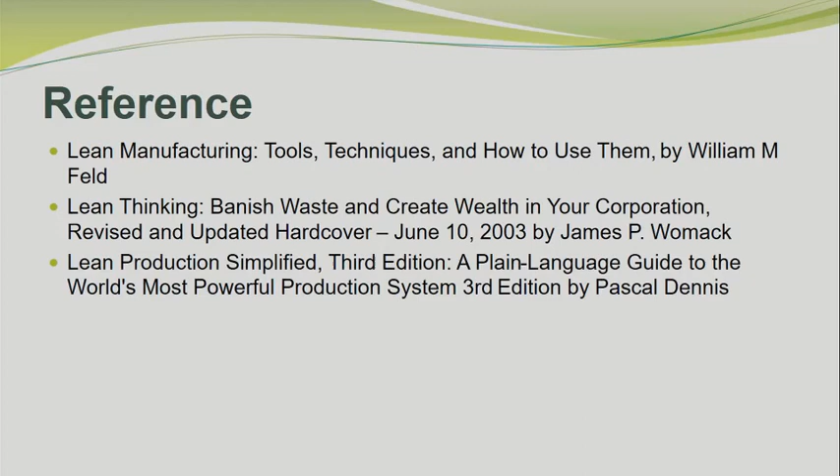Today I'm talking about lean manufacturing. I'm from this Master in Engineering Technology Management. So today is my pleasure to show you more about lean, what is lean, what is the purpose of lean, and how this lean manufacturing helps Vietnam industry.

First of all, there are a few reference books which are very useful. For example, Lean Manufacturing Tools, from which you can learn the techniques of lean and how to use them. Another book is called Lean Thinking, which covers thinking for management, how to execute lean in a company, and how to improve productivity through lean. Another is Lean Production Simplified, on how to simplify lean through innovation, improve productivity, and reduce waste. And this one is about the most powerful production system in lean manufacturing.

This is a textbook which covers lean, as I mentioned just now.

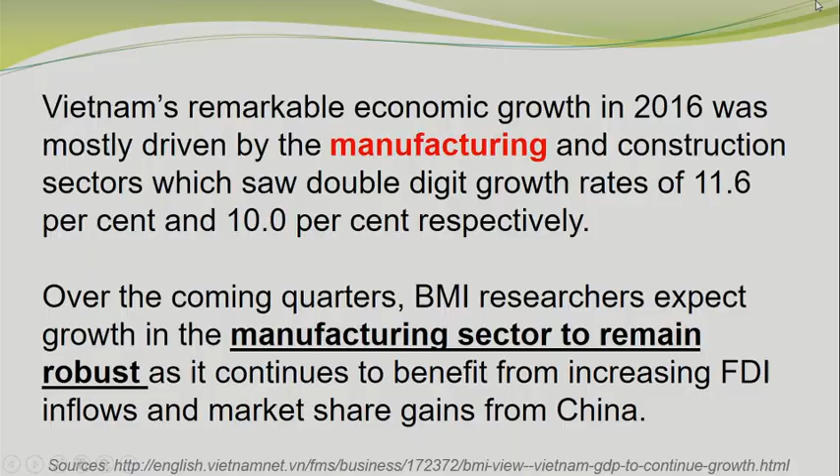Vietnam's economic growth last year was mostly driven by the manufacturing and construction sectors, at about 11.6% and 10% respectively. This shows that the manufacturing sector in Vietnam remains strong and robust, and continues to benefit from increasing growth over the next few months due to gaining share from China.

Today we are focused more on lean manufacturing, and how lean helps improve or reduce waste, and deliver on time while maintaining high quality. Here you can see the tools for lean.

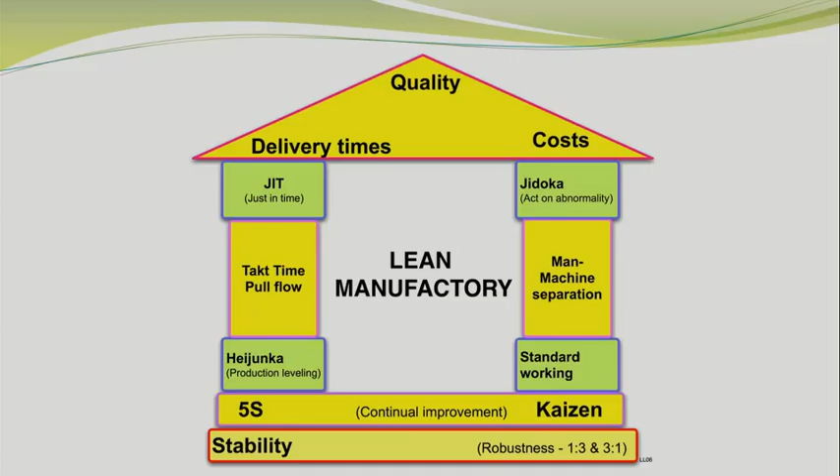Firstly, you can see Kaizen, which means continuous improvement, where you can improve productivity and enhance profitability. Then there's 5S for stability, and JIT, just in time, where you can deliver something just in time, so you are not out of schedule or facing a long delivery lead time. All of this is tools used in lean manufacturing.

From here, we know that the manufacturing line has been improved, so we need to know how to improve the manufacturing line here in Vietnam.

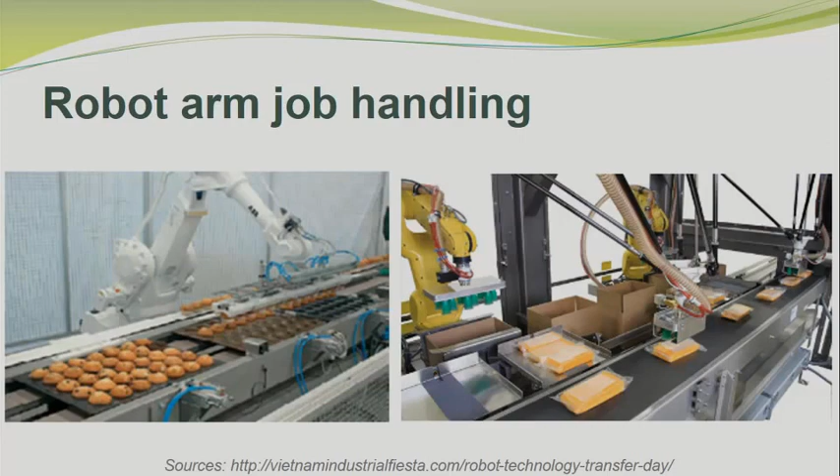So this shows a lot is happening, and we need to know what is happening now in Vietnam's manufacturing line. You can see now there is a robot arm for job handling, for example. This is the manufacturing line for the food industry, where they replace labor with unmanned robotics, using the robot arm to do the job more precisely and reduce waste.

This is another kind of automation to eliminate waste and enhance productivity. This also shows that automation improving productivity is a fact for the next few months, because a lot of new technology has been improved to replace so-called low productivity. Here we are talking about how to improve the manufacturing line in Vietnam.

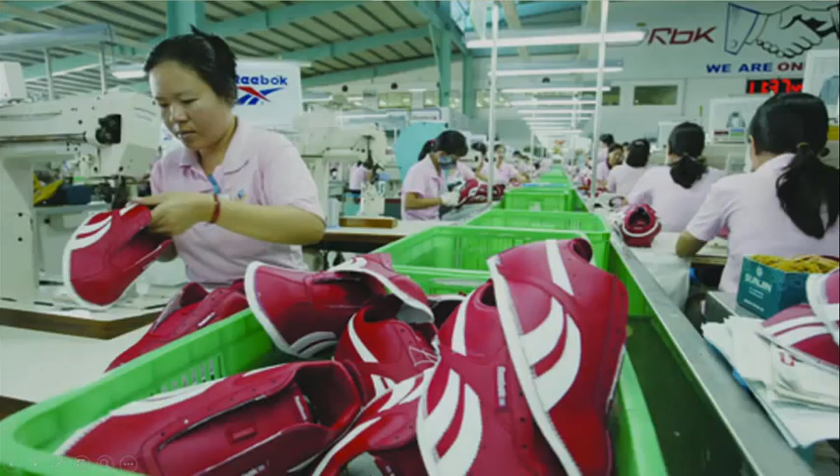For example, you can see the shoemaker in Vietnam, Reebok, nowadays still using human labor to do manufacturing of shoes. Sometimes the shoe may have a rework or reject rate, so how to improve this rework or reject rate is where lean manufacturing will guide.

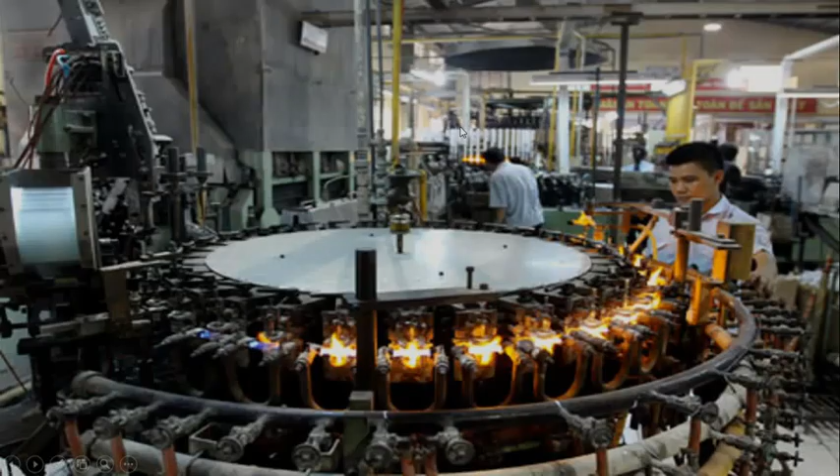And you can see a lot of workers over here still using labor. As you know, humans making things will have errors. How to minimize error, lean will guide into more detail.

Nowadays we're talking about rework. Rework means something we do and cannot achieve the quality or expectation, so we need to redo or rework it. Rework means we have to do double work to get the thing done correctly. This involves time, cost, and labor cost. Indirectly, this will cause the total cost to increase due to rework.

So these are talking about money, quality, and time. All this, if you do rework, will be at the disadvantage side. So we need to think about how to improve this in the manufacturing line.

Now we're talking about waste. Lean manufacturing means reducing or eliminating waste. The waste can be categorized into many criteria. For example, overproduction. When we try to make mass production, if the quantity is too much, it will cause additional inventory cost, additional material cost, and additional labor cost. All this is waste in operation.

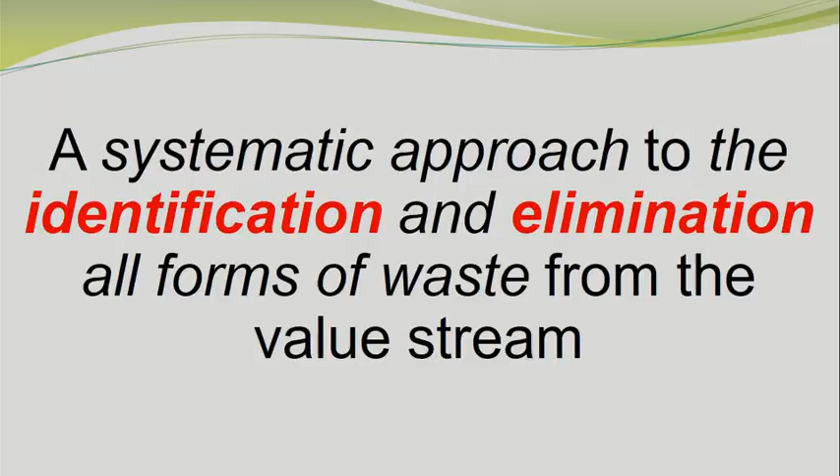Another is talent, skilled workers. Are we still relying on the conventional skilled worker, or do we have to rely on machine technology or new technology management to manage the machinery or process in order to have a better, consistent performance? So lean is a systematic approach to identify and eliminate all forms of waste from the value stream.

Movement is also a waste. If group technology is not implemented, when you move from point A to point B, it will take a lot of challenge instead of a short distance path, and this will cause additional cost due to movement.

Defect, when we do something like injection molding, for example, if the job is not according to customer expectation, this is a defect. Defect means loss, meaning additional cost that contributes negatively to profit. So defects have to be reduced.

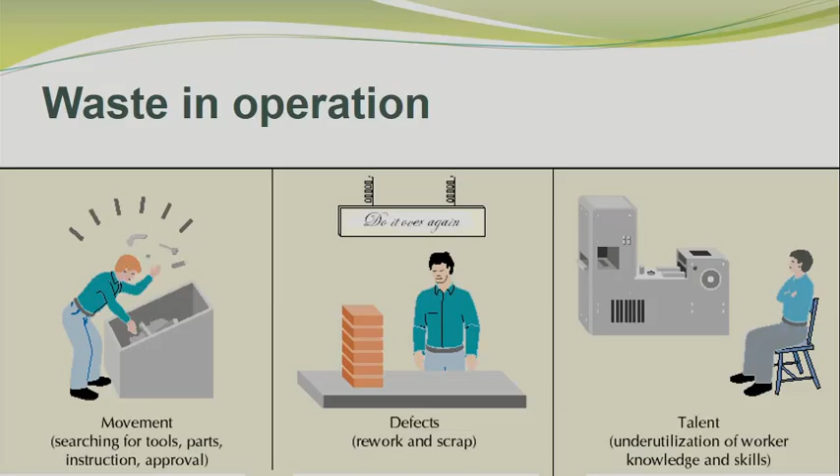Now we're talking about how to control the waste or reject rate. We have to control waste through good quality control, and we have to achieve high customer expectations with good quality.

For example, recently in automotive news, Takata airbags had a defect that caused a lot of safety issues. Defects were found in Takata airbags for all kinds of Japanese cars and Euro cars. So Takata company recalled a lot of airbags, and they had lawsuits for this because of the cost and a lot of loss of life.

So this shows you how significant lean manufacturing is in product making. For example, this Takata airbag, where you can see there is a malfunction causing improper safety. Lean manufacturing will contribute to safety for the consumer, and we can build a trust level for the customer and show the reliability of the end user product.

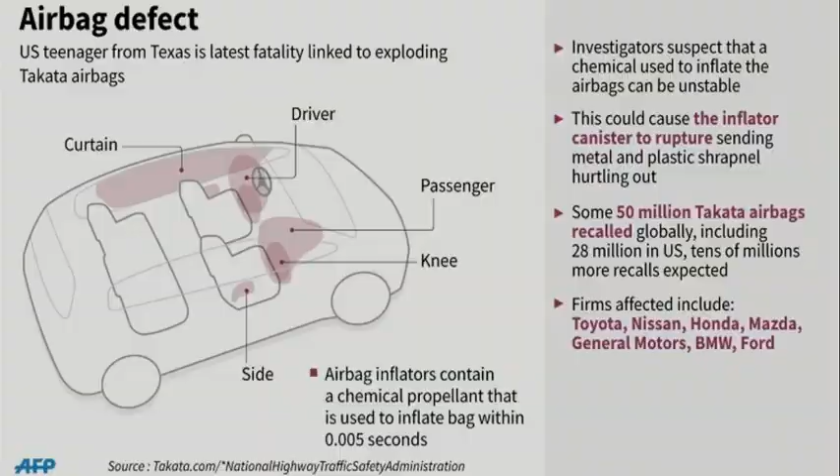This is to show you the example of the airbag defect. This shows that the airbag caused a lot of safety issues and had to be recalled, costing a lot of money, requiring research and rework again. The recent defect found in Takata airbags resulted in the biggest automotive recall in history last year. This recall cost billions of dollars.

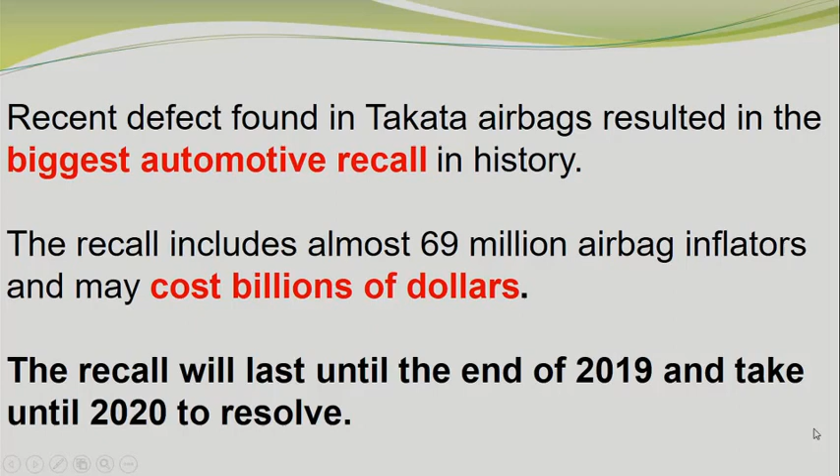Again, this recall will last until the end of 2019 and take until 2020 to resolve this issue. So now, how to solve this without lean manufacturing? How will lean manufacturing help? If a company operates without lean, they will cause a lot of problems with defects and waste money.

So the company will lose money and won't have profit in the long term. For example, Takata airbag had to pay $1 billion to settle lawsuits. All this happened because of overlooking quality and safety to the consumer. We have to ensure products can meet customer needs and expectations with zero defects and minimum cost as possible.

Just now, as a briefing, we talked about the background of the recent news and what is happening in Vietnam. So with lean manufacturing, we have to work ahead and implement and execute it to reduce this kind of risk and improve profitability and reduce waste.

Lean manufacturing talks about waste, the system, the tools, and the principles of how to improve the existing process and achieve continuous improvement. Not only this, with lean manufacturing you can improve efficiency, have a better competitive position in the market, and increase profitability for the business.

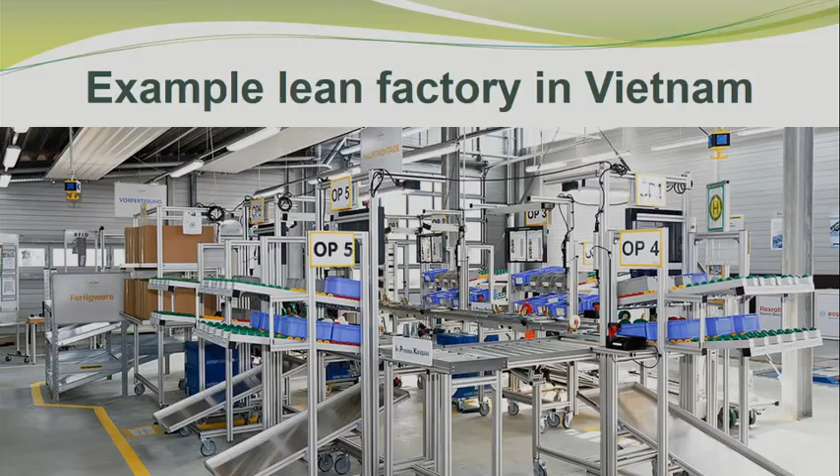So lean manufacturing is about stopping waste, or zero waste. Reduce the waste and minimize it as low as possible. Now let's talk about an example.

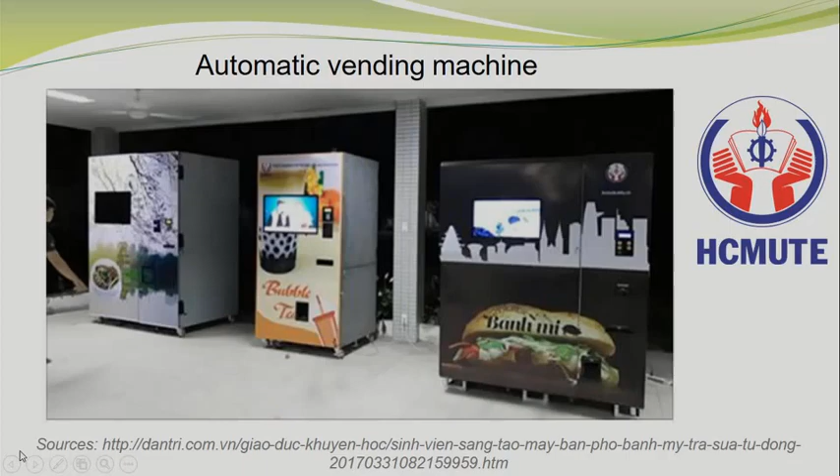Ho Chi Minh City University of Technology and Education invented an automatic vending machine. This automation is an auto vending machine for bánh mì, phở, and milk tea. This is new, and it will enhance productivity while reducing cost, because you no longer need a conventional restaurant. If you want to eat phở, you just go to the vending machine and buy it directly—very convenient.

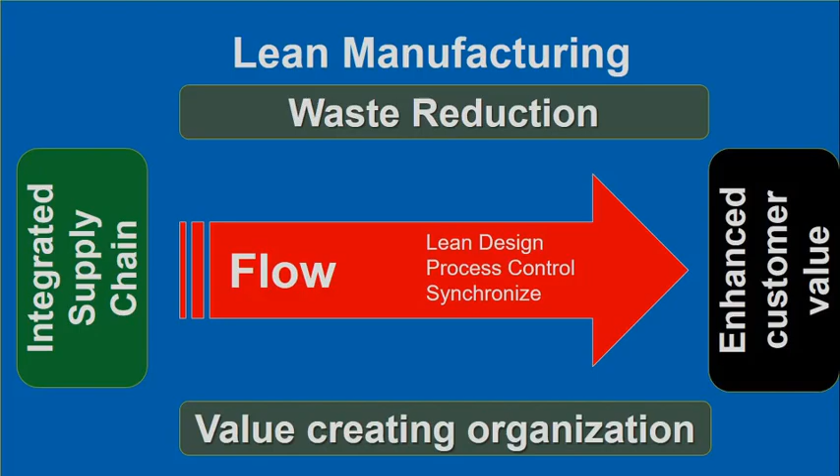So all this is innovation, talking about improvement and continuous improvement for the current situation, improving productivity. Lean manufacturing again is about waste reduction and creating a value-added point for the organization, enhancing customer expectation and value, and integrating the supply chain. All this contributes to lean design, process control, and synchronizing all processes into one centralized process. So all this contributes to lean, where lean plays a main role.

Lean cannot work by itself. Lean needs a group of people. Lean needs support from management and all kinds of departments, so that lean can move forward. Empowerment of staff is very important to make lean management and lean manufacturing successful. Successful lean implementation comes through strategy, selection, support from management, and execution like Kaizen, continuous improvement.

Lean Six Sigma is another tool for lean, where you define, measure, analyze, improve, and control. So lean is a closed loop where you can do all of this in one process: define, measure, analyze, improve, and control.

Define what the problem is now. The problem must be measurable. What is the root cause of the problem? Why is there a problem? What is the cause? How is the effect of the problem? And you analyze—how do you analyze? Through systems, tools, software, or through experience—and improve from the defect, and finally you control the quality. All this is talking about lean and Six Sigma.

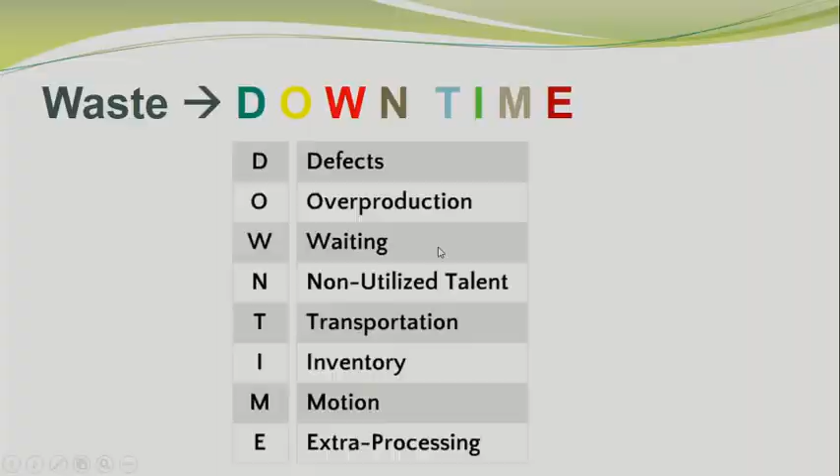Eventually talking about the MRP, talking about the ERP, talking about the goods, how you store them in the warehouse, eventually indirectly this is a cost. So in the ideal case, it should be reduced as low as possible.

Motion means the movement of the product, whether the worker works in a proper flow manner or goes a long distance just to do the same thing. So here I'm talking about group technology, where everything can be compact, and more details can be discussed.

Extra processing: you do something which is not required, extra processing for the customer. So this will contribute to additional waste.

Again, these are the 8 wastes as I mentioned to you. So there is motion, overproduction, inventory, and waiting — all considered waste.

So now we have to understand how important lean is, how lean will help contribute to an enterprise or company. Firstly, we need to get the things right: get the right things, get the right quality, get the right place, and get the right time and quantity. This will have a good lean, which will lead the company to achieve high profit and a more competitive position.

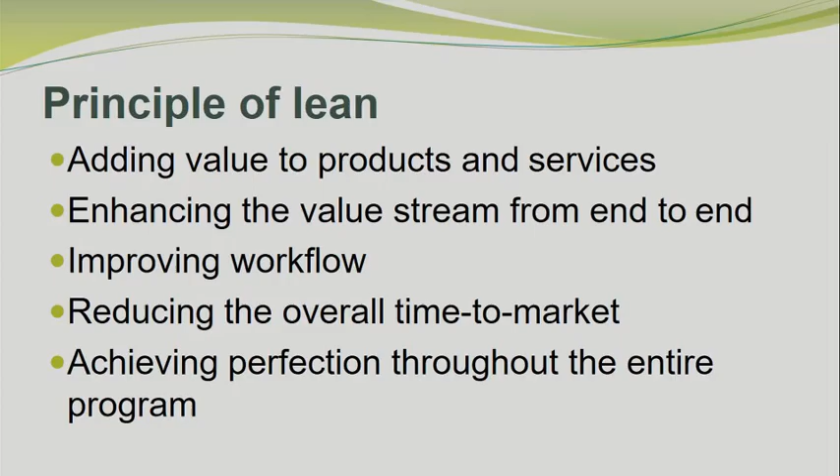Here I show you the principle of lean: to improve the product, add value to the customer, reduce the overall time to market, improve the workflow of the goods, achieve perfection, reduce reject rate, and enhance productivity.

So all of this implementation requires review of all production processes. We need to review through all kinds of departments to eliminate any non-value-added process, step, or service.

So lean means minimizing or eliminating excess waste. So what is the benefit? You can reduce waste, improve allocation of time and resources, improve productivity, improve quality, and improve customer service.

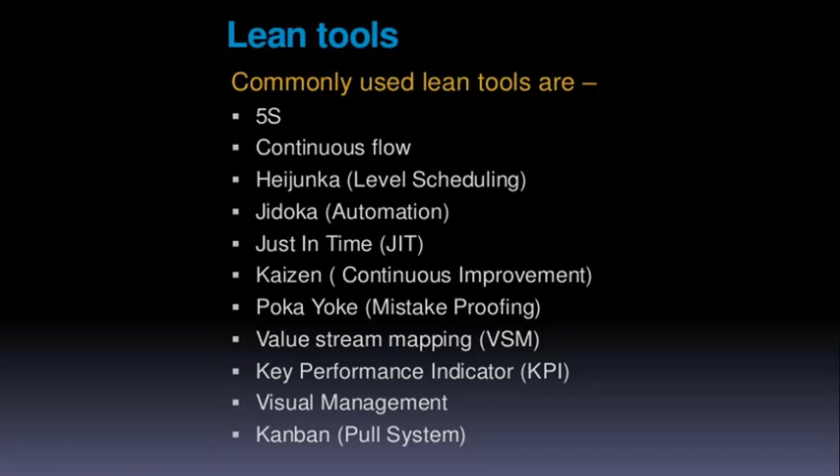So this is a lean tool talking about 5S, continuous flow, level scheduling, automation, just in time, Kaizen, Poka-yoke, value stream mapping, KPI, visual management, Kanban, etc. All of this is lean tools to enhance productivity.

Example, Kaizen. In Japanese, it means to make better or improvement through plan, do, check, act. Planning for the problem, after you plan, you do — execute the problem, solve the problem. After you solve, you check again whether this problem is solved or not. After checking, then you act, confirm again. So it's a continuous improvement process — plan, do, check, act for Kaizen. It's a continuous improvement tool for lean manufacturing.

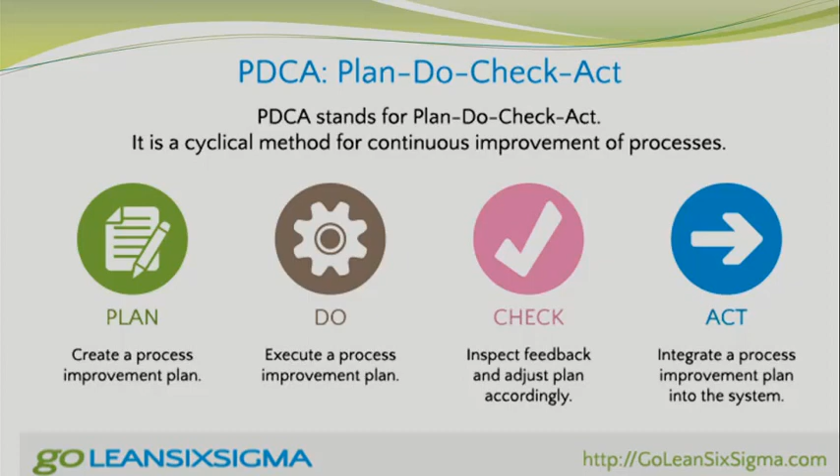Kai means change, Zen means improvement, so this is an improvement of change — continuous improvement. Again, PDCA: plan, do, check, act is a tool where you can plan, create a process improvement plan, execute the process and improve, and inspect the feedback whether it's correct or not. After that, you can integrate the process into an improvement plan.

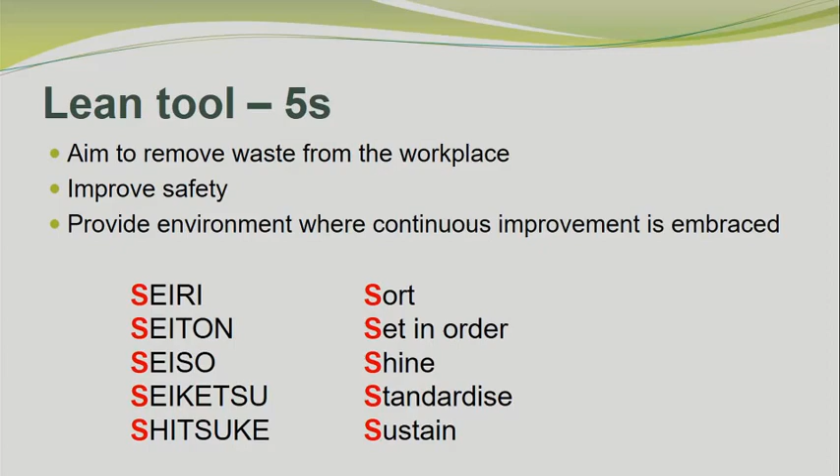Another tool is 5S, meaning Seiri, Seiton, Seiso, Seiketsu, Shitsuke. All of this is about removing waste from the workplace. Example, sort — you sort out something which is not useful and improve from this. Set in order, shine, standardize, sustain. All of this is the continuous improvement tools.

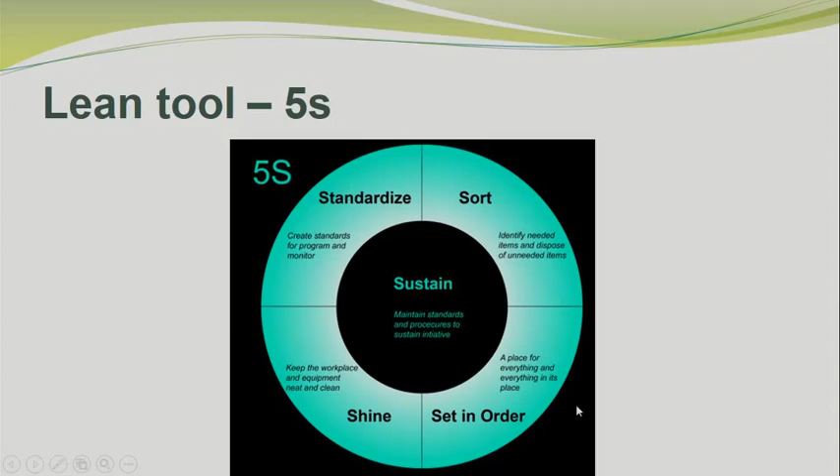So we're talking about the 5S. One of the manufacturing S's is safety. Okay, you can standardize, sort, set in order, shine, and improve.

Another is just in time. It means you make something just in time. You do not keep inventory, you do not overproduce. So it's all about reducing the inventory, just in time.

Customer says I want to have a machine within 3 months. You can do just in time, 3 months, not so fast and not so long. If customer says 3 months and you submit in 2 months, due to capacity of the worker, the worker has to work overtime, which means additional cost. So all this we have to consider for just in time.

Okay, DFM, design for manufacturing. DFM means you design something that must be able to be manufactured. Example, you design a product, then you make a prototype, then you test functionality to see if it's okay or not, then you go for production with actual tooling.

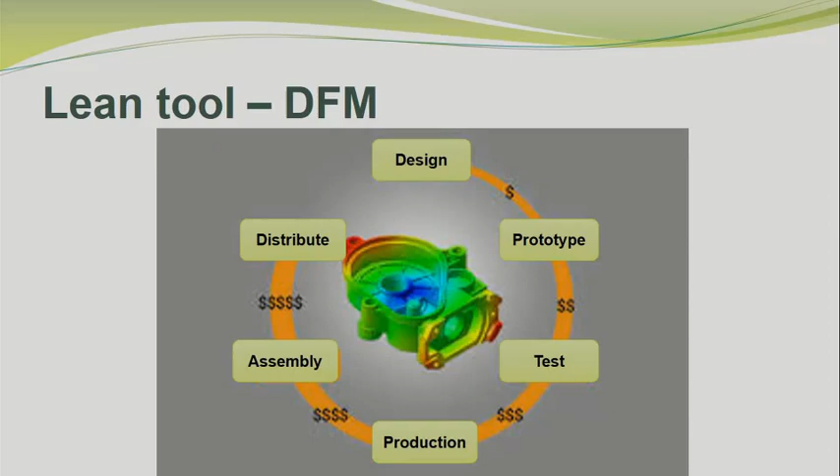For production, after that you go for the assembly line, to check whether the part can be assembled. Finally you distribute to the customer. So design for manufacturing is very important to make the product successful.

One example of design for manufacturing is a car bumper, or one of the plastic products, where you have to use simulation tools like Moldex3D, just to simulate whether this plastic product has any defect or any functionality fitting issue before going for actual production.

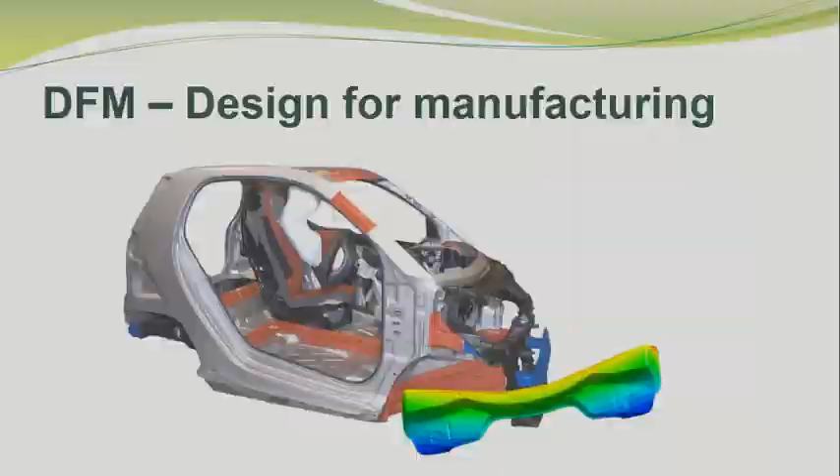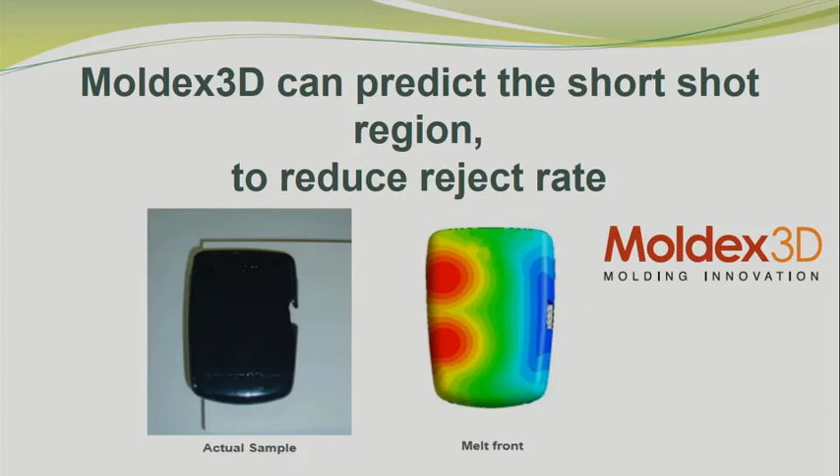Okay, now to show you why it's a success story for lean manufacturing. Example, Samsung mobile phone. Samsung Electronics introduced Moldex3D as a standard CAE tool. What this is about is they use the CAE tool to evaluate the design before going for actual production, so they can predict the problem in advance before any reject rate happens. This reduces the production cost and improves profitability through software simulation.

So this software can predict the short-shot region to reduce the reject rate. If at the design stage they already found this problem, they can solve it through product design and continuous improvement, Kaizen, and change the design accordingly before any reject rate happens.

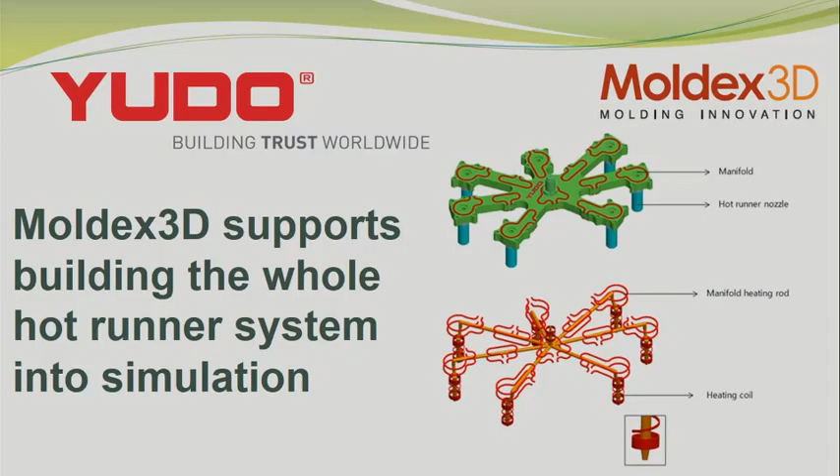Example, YUDO company. YUDO is well known for the hot runner system, where again Moldex3D software can help to design, verify, and provide optimized results in mold development. So it's about hot runner system simulation to show the confidence level and the high quality of product performance.

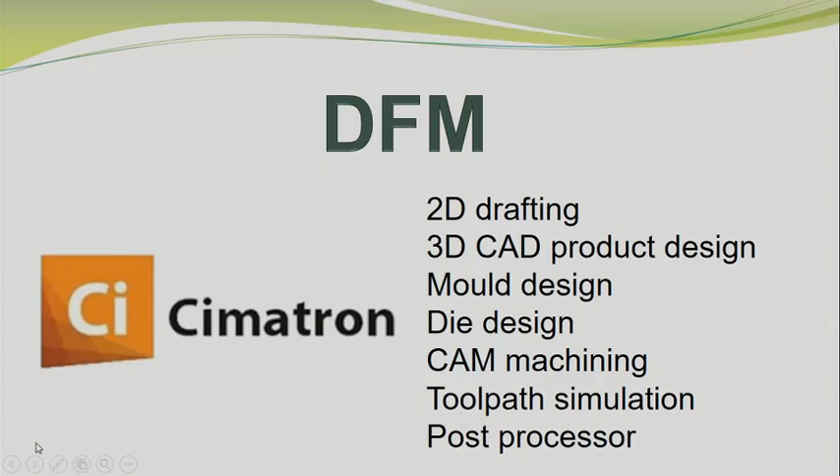DFM, Design for Manufacturing. Cimatron is one of the CAD/CAM software where you can design the product, do manufacturing, do machining, do mold design, die design, all in one total solution. So this is about the design for manufacturing line.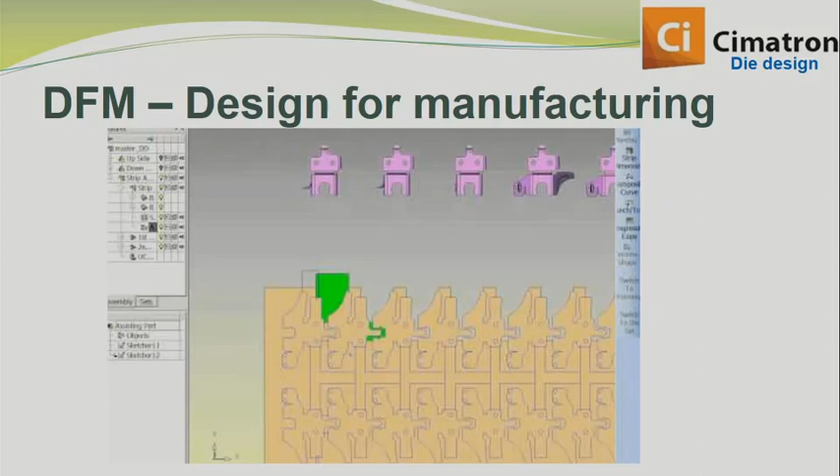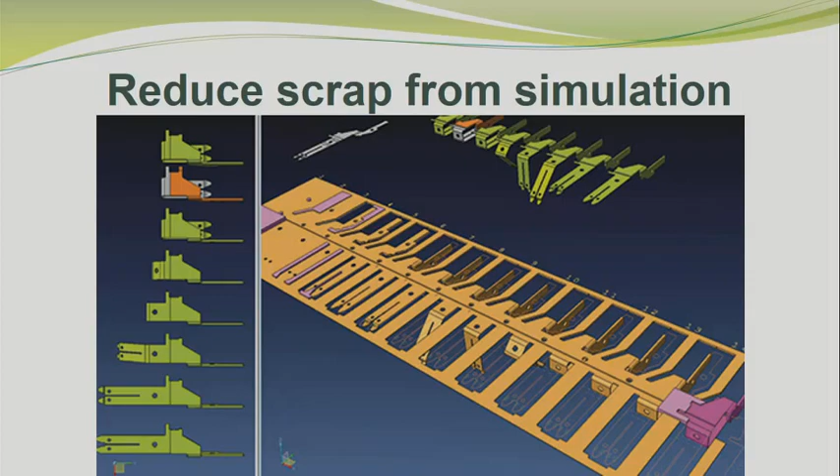So example, this is a mold design. These tools, Cimatron tools, help the die maker maintain high quality yet reduce the scrap rate through simulation, through design, and through some know-how and knowledge inside the software. This indirectly shortens the delivery time and cuts the cost.

This is one example of die design, where you can see the die design optimizes the space, optimizes the result, and reduces waste, compared to without these simulation tools.

In the old days, they had to rely on experience. However, nowadays experienced workers are difficult to find. So with the existing design, using the software will help enhance manufacturing, reduce scrap, and reduce waste through DFM. They achieve organized, nicely arranged processes to reduce waste for stamping or die design mold.

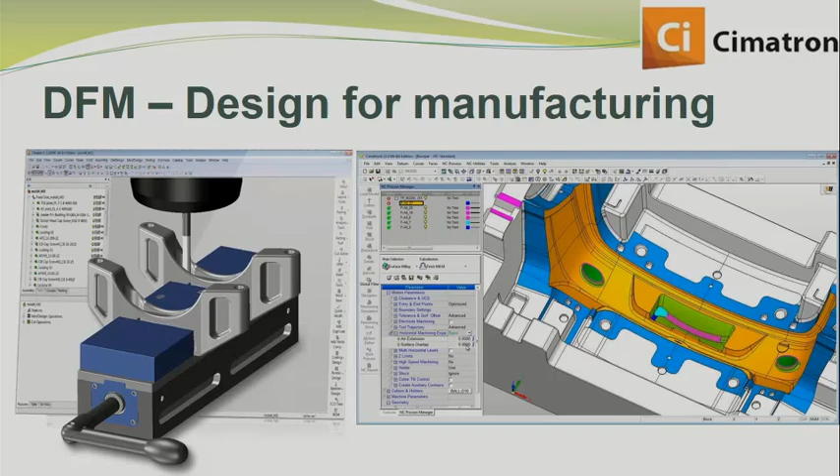This is another example of simulation, where before going for actual machining, they do a tool path simulation. From here you can see if any error will happen, or if any additional undesired process exists, so that they can eliminate it at an early stage.

Okay, Lean needs leadership from the company. We need support from management, and we need to communicate with all levels of staff. And empowerment—we need to execute all the tooling, all the documentation, and work as a team.

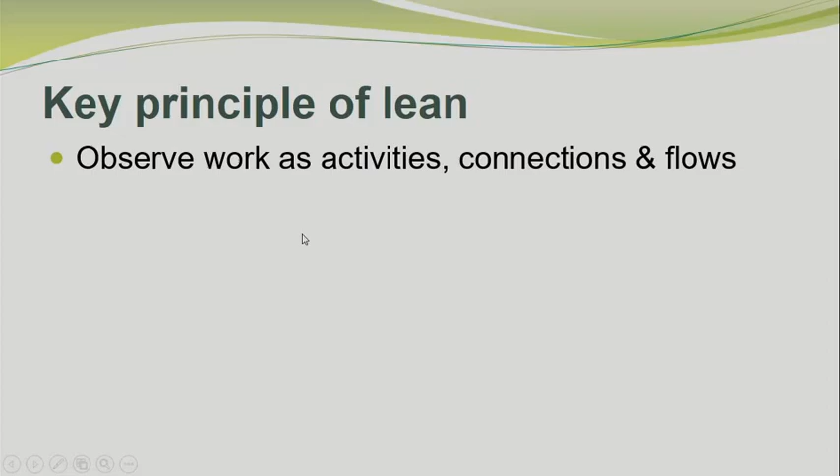So Lean is about solving problems by exposing all kinds of issues. Okay, key principles of Lean: observe work as an activity, and systematically eliminate waste, build high agreement, know-how, and problem solving.

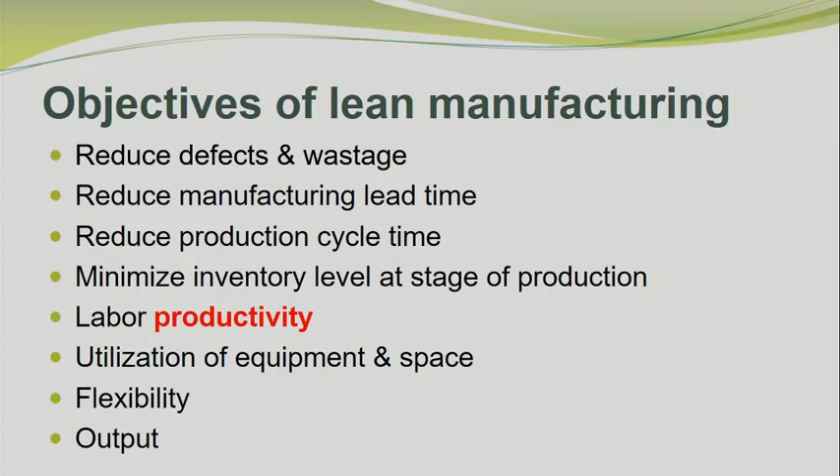So all this about reduce defect, reduce manufacturing lead time, reduce cycle time, enhance productivity, utilize equipment and space, and improve the output of the company. Implication will be improve customer expectation, yet reduce the waste. Finally, the goal is to eliminate the waste from the process.

Company will benefit from Lean. Why will we benefit? They will improve the productivity, reduce the waste, and have high profitability, so that they can be more competitive advantage in the industry.

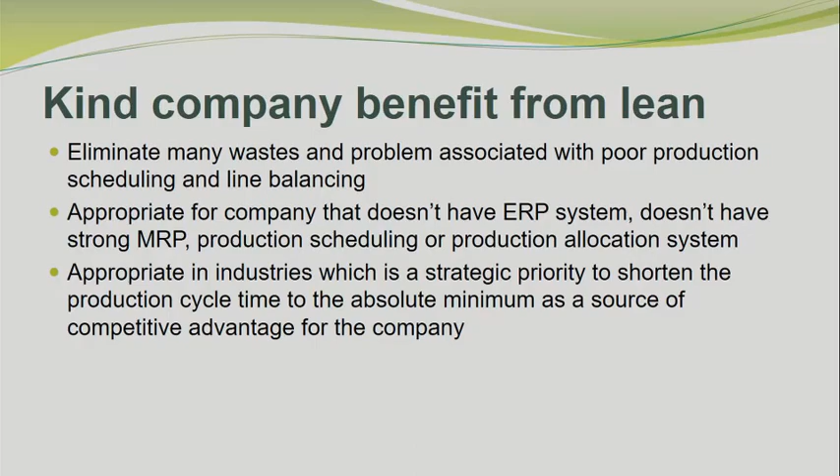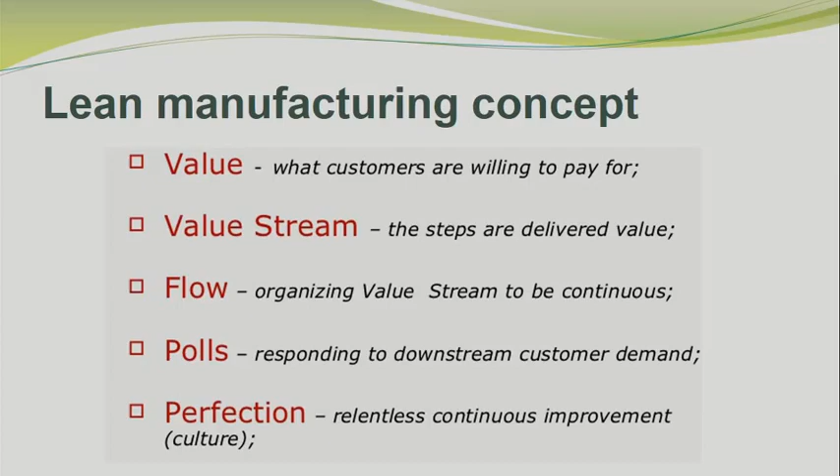So Lean concept is about value. You need to have some value added to the customer, so that the customer is willing to pay. Value stream, so you can know how to deliver the value to the customer. Flow, you can organize the value stream for continuous improvement. Pull and perfection, to make continuous improvement of the process.

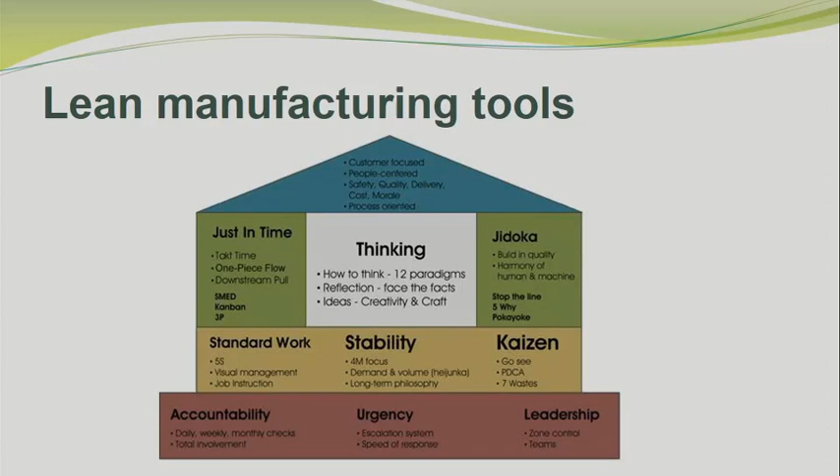So these are about the Lean manufacturing tools. You can think: stability, Kaizen, just in time, Pokayoke. So all of this is a tool for Lean manufacturing.

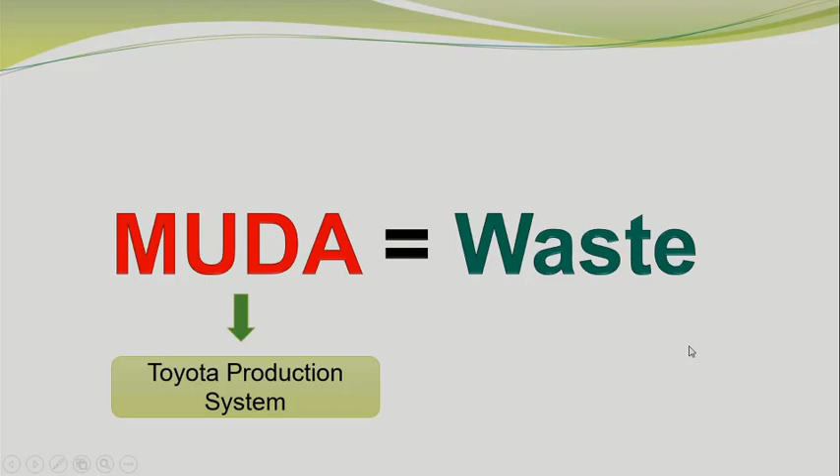For example, Muda, in Japanese word, means waste. This is one system used in the Toyota production system, where they use Muda to reduce the waste. There are three systems used: Muda, Mura, and Muri. From here you can see all kinds of ways to reduce and improve.

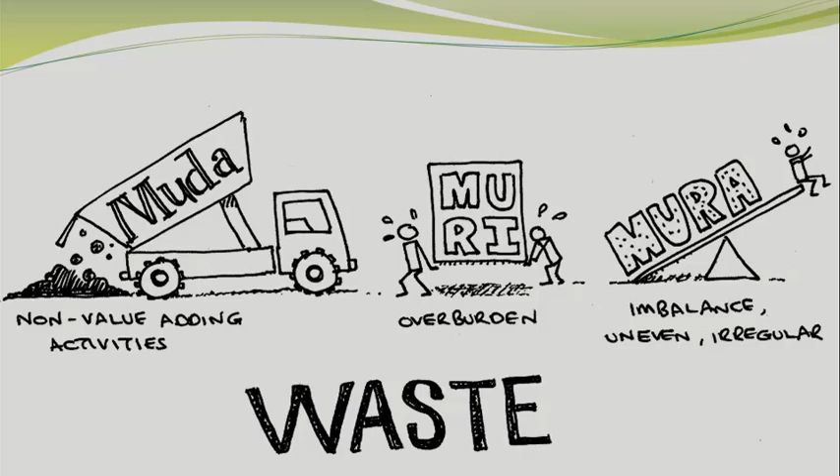Muda is a non-value adding activity, it's a waste. Muri is an overburden, it's over design, it's not necessary, it's a waste. Mura is imbalance, irregular, so also a waste. This is a summary about the waste.

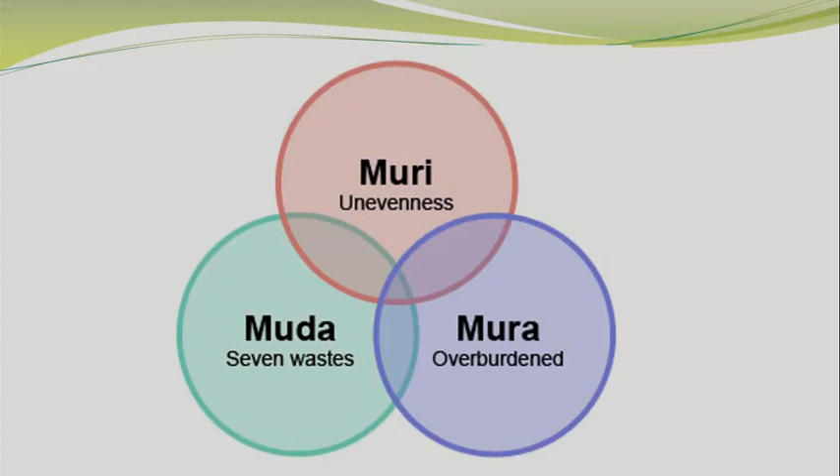Muda has 7 wastes as I mentioned. Mura is an overburden, and unevenness for Muri. These are the 7 wastes: transport, movement, waiting, over-processing, defect, inventory, and overproduction. All these are waste and should not be seen in the production line.

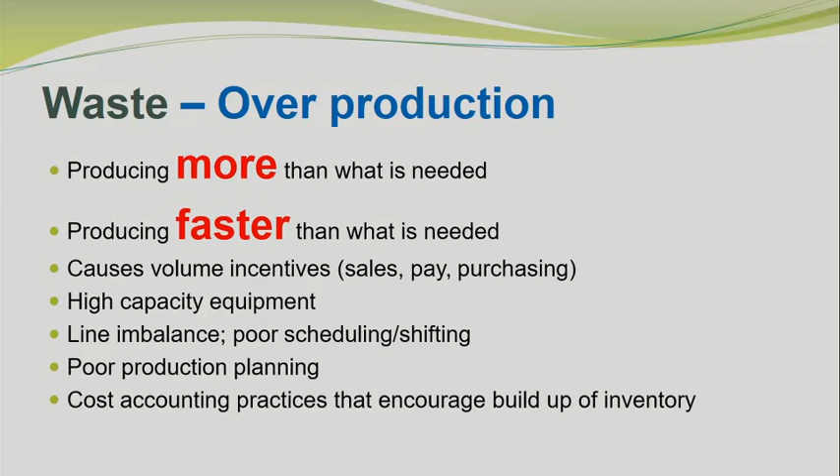Again, these are about the 7 wastes. Overproduction, we need to produce something more than what is needed. Is it correct? Or we need to produce something faster, yet have a high quality result. Poor production planning will contribute to the waste of overproduction.

So how to solve this? One reason is through a Kanban system. For processing waste, you can solve it through identifying non-value added machining process or non-value added manual processing.

Transportation: unnecessary material movement, unnecessary tools and equipment movement, poor route planning, and distant supplier and poor layout. All this is talking about transportation.

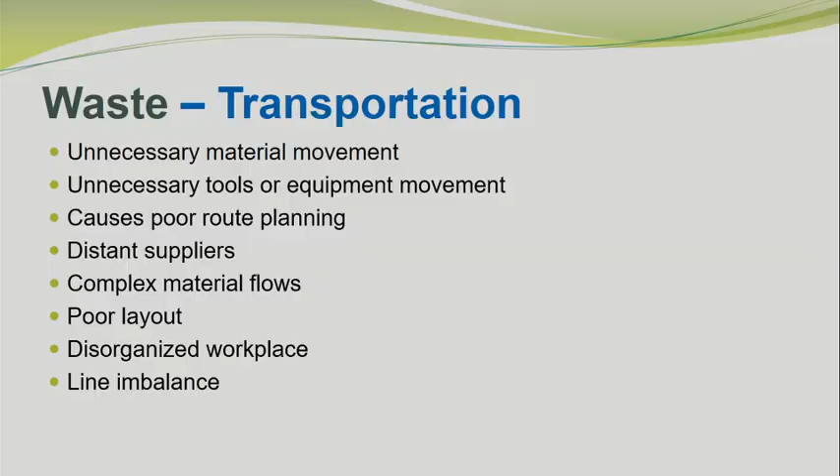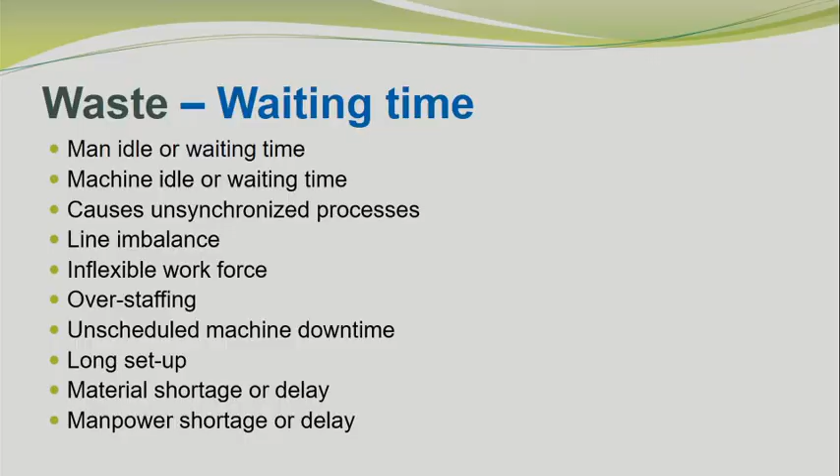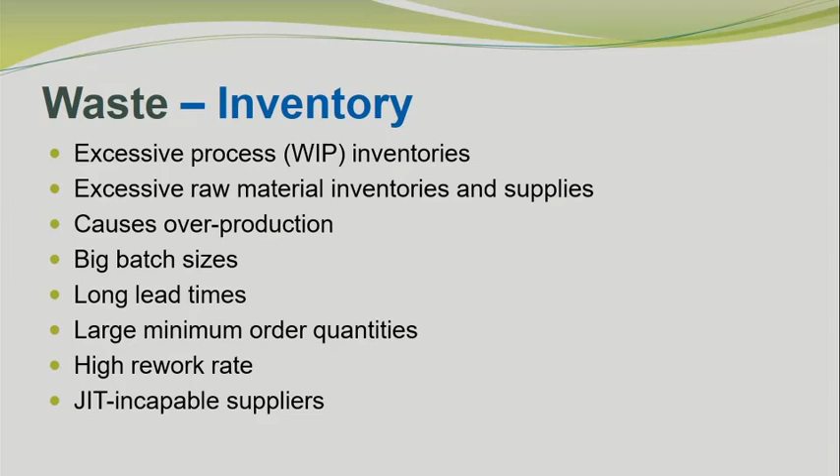Waiting time: machine idle or waiting time. Machine is not performing, machine is not utilized. This will cause waiting time and cause an unsynchronized process. Finally, waiting time will cause overstaffing. We recruit some staff who are not performing the job, and this will cause a loss for the company.

Inventory: excess process inventory. WIP means work in process. Too much inventory is not good, because you need to keep the raw material, you need to keep the supplies, you need more paperwork, you need to equip more people because of inventory, and this causes a lot of problems, causing overproduction and long lead time.

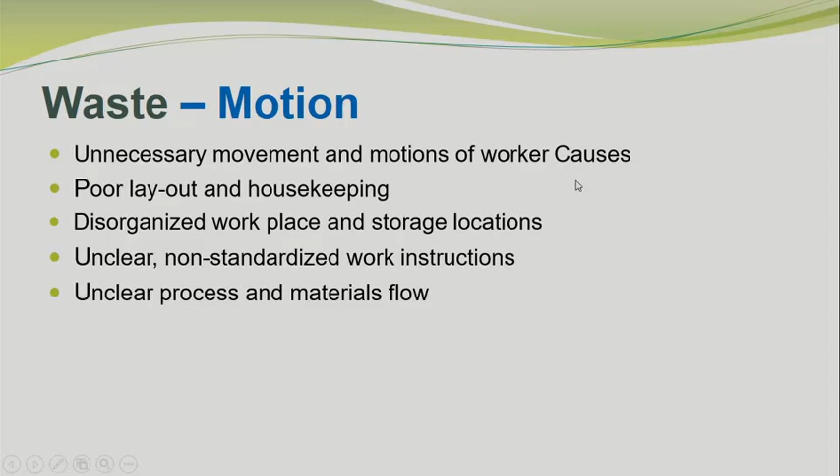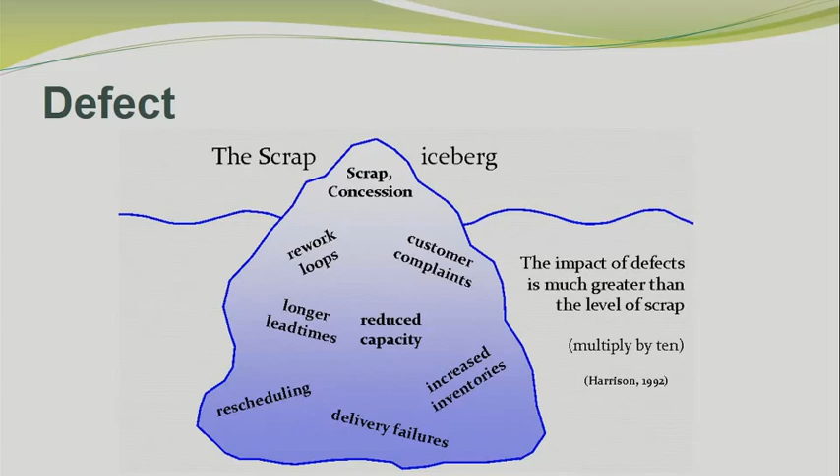Defect and scrap are the same. Scrap will cause a lot of reject rate. Then we scrap and we need to rework, to see whether it can be reworked or not, and whether it can reduce capacity or not. All this is about defect. So we try to reduce the defect as much as possible.

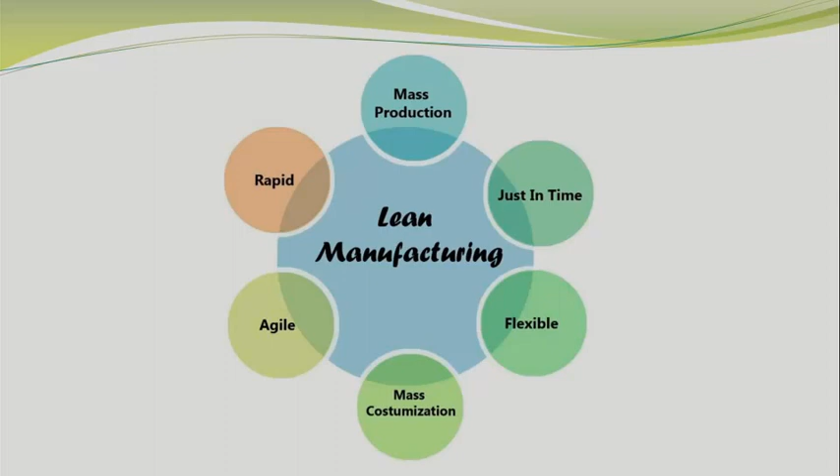As a summary, lean manufacturing involves a lot of mass production. You need to plan properly to prevent overproduction. Just in time, flexible, mass customization, rapid and agile, must be strong, and there must be empowerment to the staff.

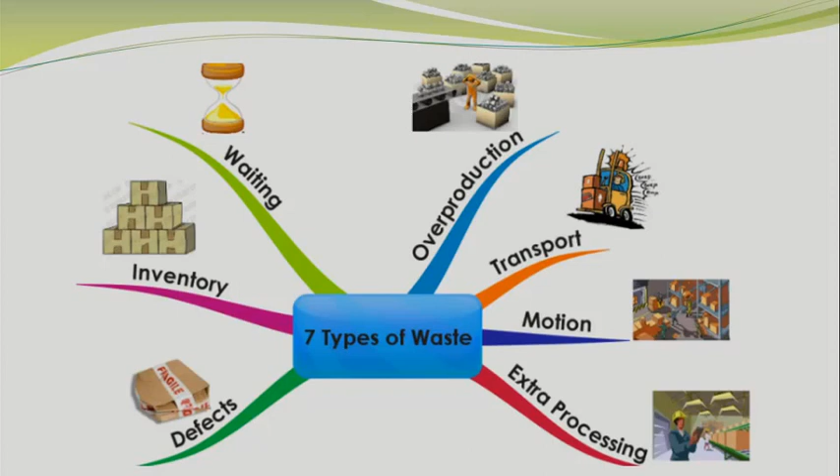So today, as a conclusion, we talked about what is lean, what is the principle of lean, what is the objective of lean, what companies benefit, what's the concept, and what's the tools. So that's all about. Thank you very much.